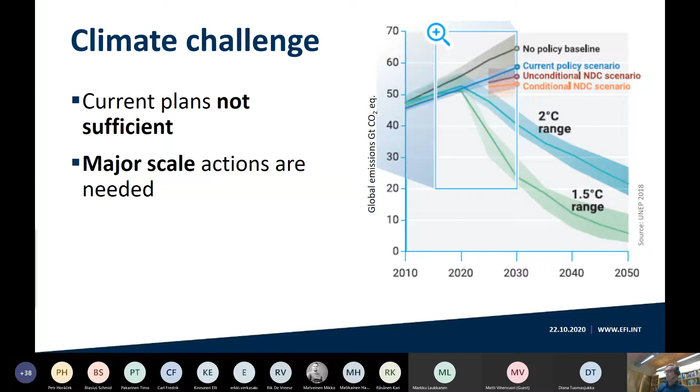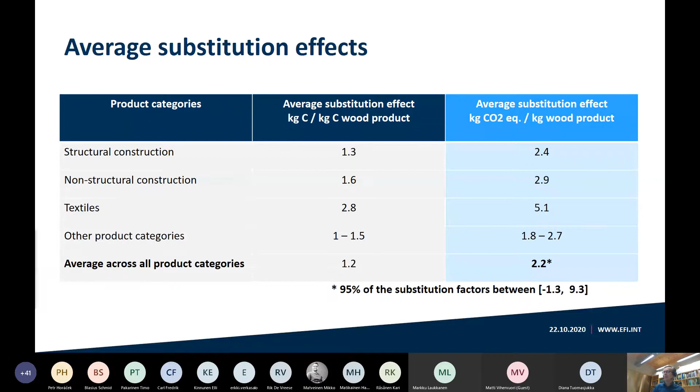If we use the kilogram of wood or forest biomass for textile production, then the numbers can be even bigger. But in any case, there is clear evidence that in the technosystem, wood construction is clearly beneficial in terms of climate change mitigation. And this is of course important for the wood construction sector and our climate challenge, as I mentioned. But on the other hand, if we have good product level substitution benefits, that is as such not enough. We also need to have big market volumes

In the packaging and paper industry, we have the market volumes, but on the other hand, we have quite a lack of knowledge because of the large variety of packaging materials. We really don't know what the average substitution impact of packaging materials could be. We need more studies here. Then if we consider the printing and writing paper side, we have the market volumes, but here the substitution could be the other way around because of electronic possibilities to read newspapers, for example.

But again, in construction related materials, sawn wood production, for example, we have the market volumes and we have relatively high product level or intermediate product level substitution factors. So we can say quite safely that wood construction already contributes quite significantly to climate change mitigation. So these were the results, and now I'd like to give some take-home messages on the wood construction side before Rik continues on urban planning issues.

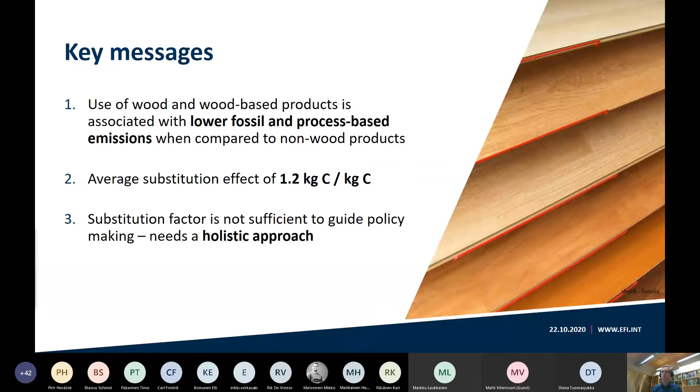So just to repeat, almost always when using wood or wood-based products instead of non-wood-based products, it is associated with lower fossil and process-based emissions. So this seems to be clear evidence. We can produce some average numbers, but on the other hand, this type of substitution calculation is important, but not sufficient to make decisions or guide policy decision making. As I mentioned earlier, we need a holistic approach that takes into account the full picture: the left-hand side of the equation on forest ecosystems and the right-hand side on technosystems. Both should be taken into account simultaneously.

And finally, even if we are using wood as a construction material, it's really important to try to do something better in the future than we can do currently. We need more resource efficient production processes. We need to minimize material waste. And this is something that the wood construction related industry should keep in mind as well. We need to do better in the future than we can contribute today.

Then in many significant potential future areas, we have quite a lack of knowledge on the climate impacts of emerging forest or wood-based products in the textile industry. We need more studies. The packaging industry, and especially the chemical industry, is a really wide topic, and we need many new studies. In this frame, although there are of course knowledge gaps when it comes to mitigation impacts of wood construction, I would say that it is still maybe the best known area. So that is of course a positive side for wood construction.

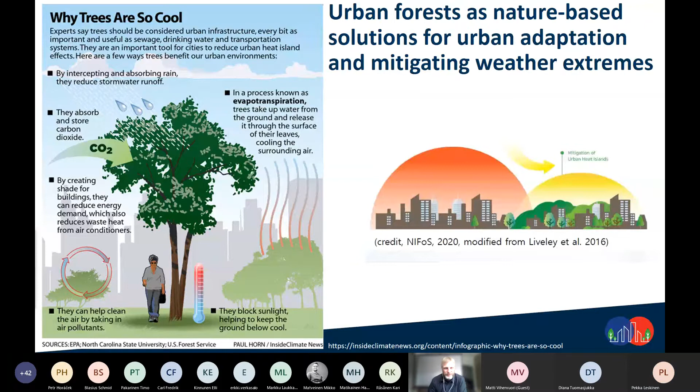So next slide, please. Pekka, I think you are on the controls. Can we have the next slide? I'm trying to change. I will continue my story in the meantime.

As you see here, and as already introduced, the co-benefits of urban trees and urban forests go beyond carbon and climate. As I said, creating a nice environment leads not only to a shift in the use of transport systems, but to healthier people. The impact of urban forests and trees on public health is really still underestimated.

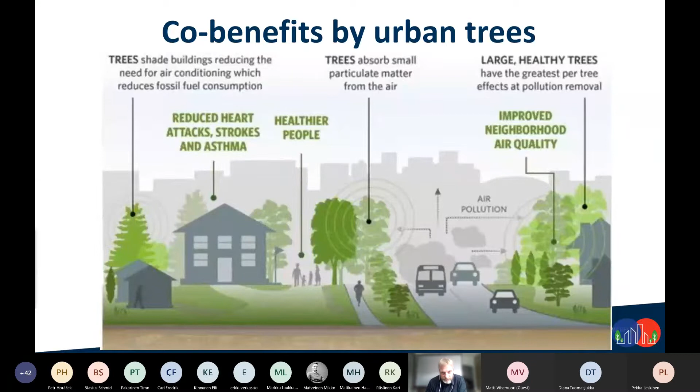And of course, this is a real flagship project, but it illustrates very nicely what we can achieve with building with trees and building with wood or building with nature in the cities. Every year, the trees and the shrubs on the towers, there are 2 towers, avoid or absorb 30 tons of CO2, and they produce 19 tons of oxygen.

As I already introduced, the energy consumption both for air conditioning and for heating the building are lower. It's a 1/3 gain we have there, and it contributes to a decrease of 2 degrees Celsius for the urban heat island effect. Well, this seems to be not very high, but it is important. Every degree we can avoid in the heat island leads to saving human lives.

Also for the biodiversity, well, it's a calculation, it's an assessment. I don't think there are already counts done, but the expectation was there would be 20 more bird species present around the building and 59 more plant species than if this would have been a traditional concrete tower. And I've also introduced the healthcare impact.

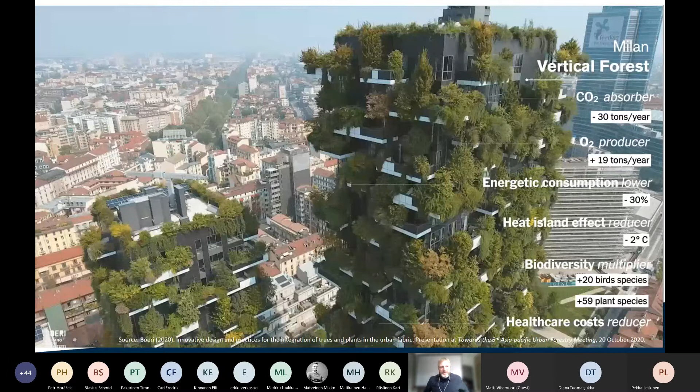This brings me in the next slide to the concept of integrative planning in cities and landscape planning. The Bosco Verticale illustrates that integration of landscape planning and city planning can contribute to compiling shared goals in respect of sustainable development. It's not only the building guidance who has to put forward the need of building with wood, but also landscape architects, city planners, and so on should share the same goal.

And well, looking at trees and woods, it's a nice story, maybe, that you can start from a single tree, which is at the moment growing next to the building, but it can also lead to a new wooden building in the future. As I said, it's a transdisciplinary approach, which brings different sectors and different professions together to solve common problems, which are dealing with public landscape.

Although, of course, lots of the forests are private, forests are still seen as public owned. There are lots of opinions on forests. I don't have to tell this to this audience, I think, but also buildings like the Bosco Verticale create some common language, common experience for the cities.

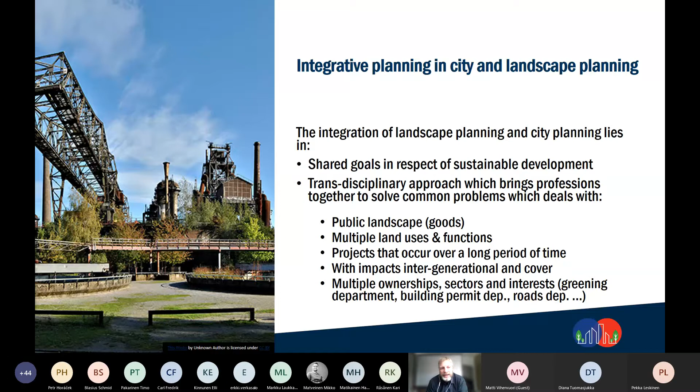So in integrative planning, you start looking from a very broad, very wide perspective, the surrounding landscape, and this ultimately leads to creative visions and integrative visions for the individual building, like the Bosco Verticale.

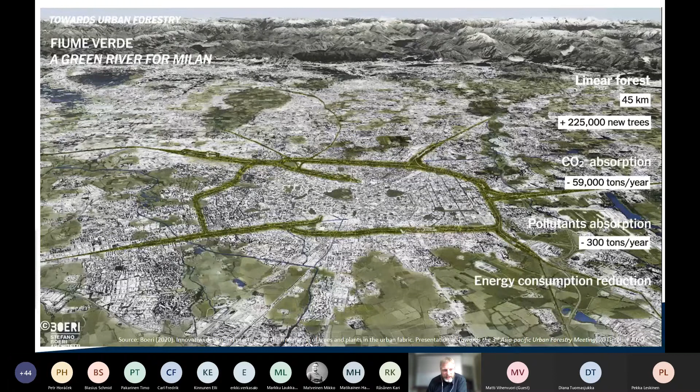So integrative planning starts from creating multiple benefits for, well, in the case of the Bosco Verticale, for new residents, but also for the communities who are already there. And we all know that there's a lot of movements in our cities. People come in, people go out, new communities come on, old communities sometimes feel pressure from new communities.

But if you work from an integrative planning perspective, you do not only create a new building, but you can also create a new environment which is also attractive to other people. And by building things like the Bosco Verticale, which is integrating a lot of green in the urban landscape, we also provide some additional benefits for people who are already living in the area.

So we can promote the use of wood and wood-based materials as substitutes, like Pekka introduced, but at the same time, we also can integrate some new tree planting. And also there, for planners and politicians, for instance, this can be a very nice story where you can indicate, well, look, for this new residential area or industrial area, we had to cut, let's say, 500 trees, but look, we will be planting 5,000 trees. So we are really substituting what we took out of the forest by new trees and new urban forests.

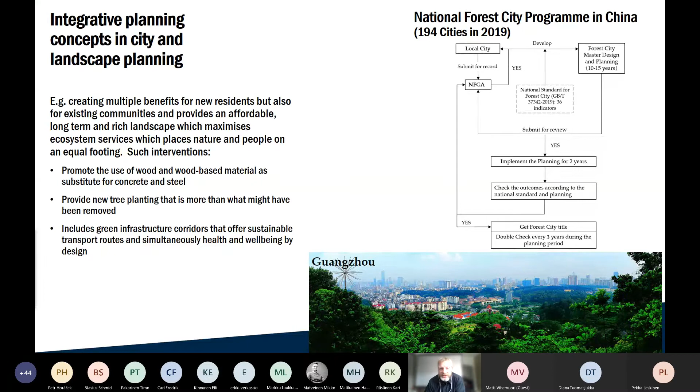Of course, when it comes to planning, China is a very nice example of how you can achieve things with longer term planning, 10, 15, 20 years. And within the Clearinghouse project, we are looking at what we can learn in Europe from this Chinese National Forest City program.

So this brings me to my key messages. The first message is reiterating what Pekka said. Wood substitution is not sufficient. We need a holistic approach, and the holistic approach should go beyond the individual building, beyond the individual tree, and also beyond the decision to build with wood. We should look at how we can include urban trees in the urban environment.

One of the challenges, which I didn't touch upon, is to conserve existing trees and forests in cities and towns when we are redeveloping or developing cities further, but also how we can use building and urban planning to increase the tree cover, at the city, street, and plot level. And building on what Pekka said, we should also integrate the use of wood-based building materials in building directives.

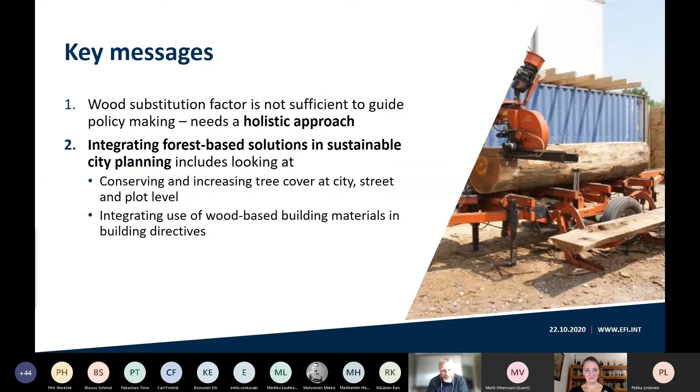With that, I would like to lead over to Matti Kuittinen. Matti is an architect with a passion for resource efficient and sustainable construction, and he has been working on improving building performance in different roles, such as a professor at Aalto University, but also as a senior advisor at the Ministry of Environment of Finland. In the latter function, he has been fundamental in advancing a method for assessing low-carbon construction for Finland. And I'm curious about his presentation today, which is about carbon footprints and handprints, searching for the balance in the built environment. Matti, the floor is yours, and please feel free to share your slides.

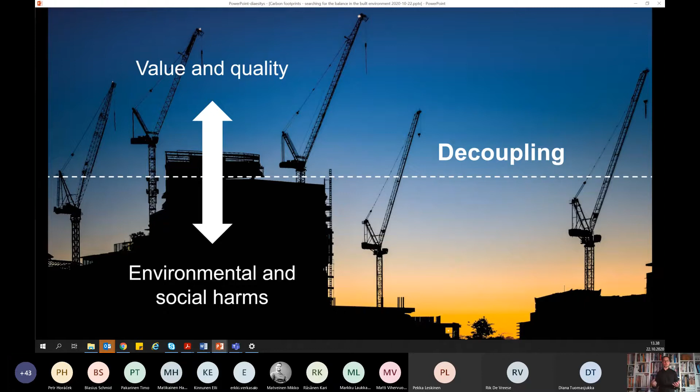This is a significant challenge for all of us, and I'd like to say from the beginning that we should not build anymore and think that we will solve the crisis by doing the same amounts of operations in a different way, but we should also critically review the needs for all new operations, including construction operations. The reason for this is rather simple. We at the moment consume half of global raw materials for construction, and in the near future, as the population grows towards 11 billion, as the infrastructure ages, and as the sea levels are steadily rising due to the most likely collapse of the Greenland glaciers, there will be significant needs for new spaces for different functions and relocating the existing spaces and infrastructure.

And if we take a look at the climate budget side of this equation, according to IPCC, at the moment we have around 570 gigatons of CO2 available within the carbon budget if we want to keep the global warming within 1.5 degrees. Now, if we continue to produce construction materials, such as cement, steel, aluminum and plastic, with the current consumption rate and current technologies, we're going to almost double the amount of emissions that we could allow to emit if we want to keep the global warming in the preferred range. So that's rather serious, and this is just between now and the year 2050, so in 30 years.

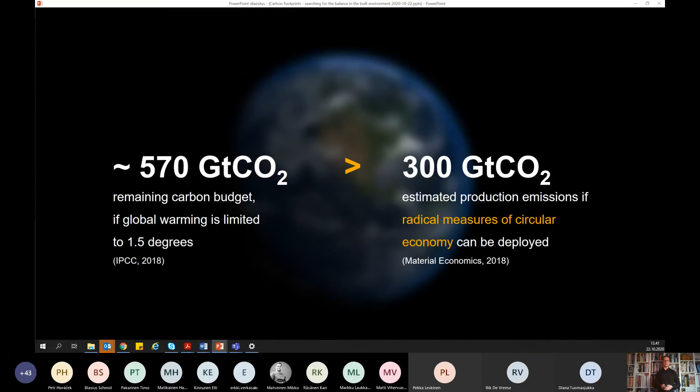If we could, however, switch into production technologies that are very energy efficient, and if our factories could run on renewable energy, then possibly we could push this figure down to a nicer looking number of 550 gigatons. But that's still almost the entire global carbon budget, so it's still too much. There's actually a meta study of recent processes and recent innovations, and it's been estimated that with these new radical measures of circular economy, we could possibly push this figure down to 300 gigatons. But that requires rapid scaling of the lab scale technologies that are still in the lab. So that's also challenging, but this appears to be the only way to go if we truly want to keep with the Paris Agreement's goals. So that's why the decoupling is important.

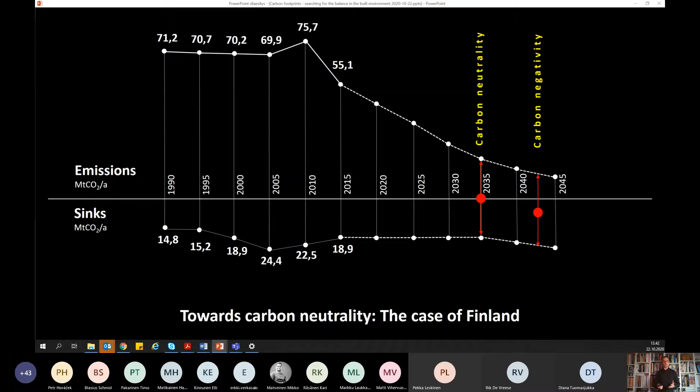Now, if we look at the Finnish case, we have relatively good statistics about our emissions and sinks over the years, and then we have political goals of reaching carbon neutrality and carbon negativity. So we need to go down with the emissions and maintain the sinks, and hopefully by year 35, so in 15 years, these are in balance and we have reached carbon neutrality. And as you know, the quest doesn't stop there, but we are aiming towards carbon negativity in the 2040s. And I consider it important to consider how we can also increase those sinks within the built environment, as the previous speaker was talking about. That might become an important issue, especially when it may be rather difficult for our agricultural sector to cut their emissions in the required scale.

Now, this is why I said in the beginning that we need to reconsider the needs for new construction. Do we really need to build so many new buildings? If we look at the population trends in Finland, it looks rather flat. Of course, we understand that the infrastructure is aging, but I think that this requires some consideration of thoughts that may first feel a bit unpleasant.

Because I'm an architect, I've been thinking about how these should be translated into design guidance and priorities. And I feel that we should reconsider the priorities for construction like this. I think that the most preferred option always should be to utilize already existing spaces that don't need modification, but just need agreement on the share of those spaces. That way we could have a much better use of the existing invested resources in the built environment.

Then the second best option would be to renovate an existing building so that it fits the required needs. Third best option would be to do an overall refurbishment of the building. And actually, when we look from the resource efficiency and carbon efficiency viewpoint, building a new one could be considered as the last option. Of course, this is rather narrow-mindedly looking only from the viewpoint of resource efficiency and climate impacts. There are other reasons that may well justify building new buildings, such as health or safety and so forth. But if we just consider the use of resources, this is how it could look. This could be the priority for construction.

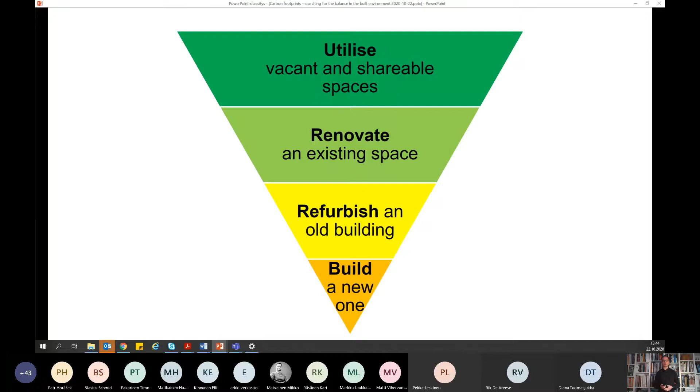Then if we choose to build a new building, what are the means of doing the new building in the most climate and carbon efficient manner? I could present a strategy that looks like this. We could consider three different aspects. We should consider the premise for building, then sufficiency and efficiency. Normally we only talk about efficiency, but I think that we have perhaps unintentionally left aside the questions of premise and sufficiency. What do I mean by these three viewpoints?

The premise means asking these rather difficult questions already in the beginning of the project. Do we really need to build? Couldn't we use space as a service? Or if we end up building something, what is the most efficient or most optimal building type for our needs? And how could we share those resources that we are developing and creating while we are building? Then, if we just consider the premise without changing sufficiency or efficiency, we are already better off.

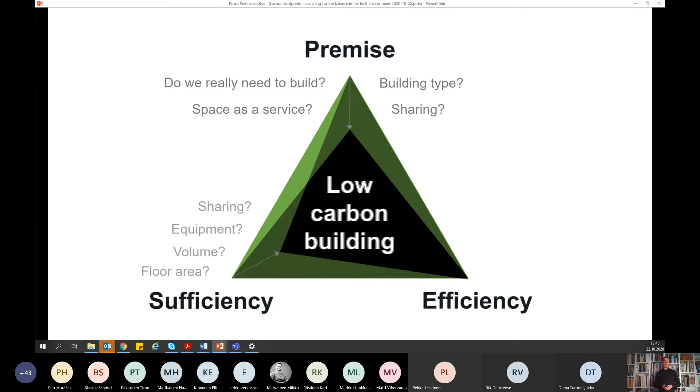The next point where we can make a change is to consider sufficiency. How much floor area, how much volume do we need for the building? Can we do the design in a manner that really serves the functions and the needs of the users and still use less area and volume? And again, how can we share the space? And if we do these interventions of sufficiency, even if we wouldn't change the premise or the efficiency, we would again be better off towards a low carbon building.

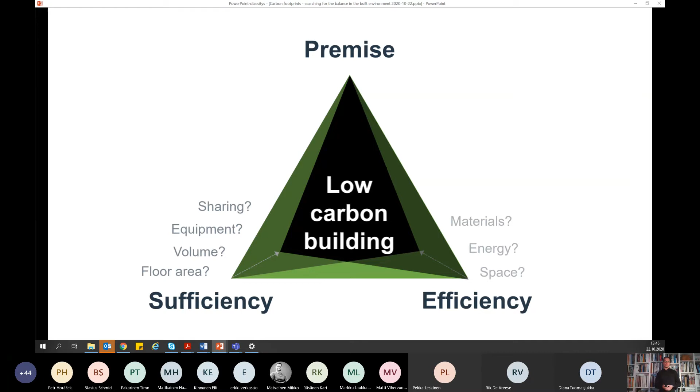Then finally, the efficiency is what we normally talk about when we talk about energy efficient or low carbon buildings. We consider the efficient use of space, energy efficiency and material efficiency. And these are of course important, but I argue that we shouldn't start from the efficiency without first thinking about the premise and the sufficiency. And in the ideal case, if we can make improvements in all of these areas, the added impact would be even better.

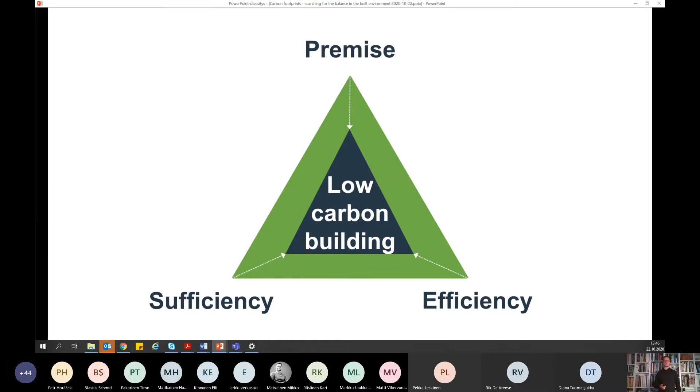So then a few words about policies. As many of you know, we are planning new building regulations, and one of the things would be limit values for different building types in terms of their carbon dioxide equivalents. The title of my presentation was about handprints and footprints, and here is where that concept comes in. Now, the emissions on the right-hand side, we normally describe them as footprints, something negative that happens. But I think that we should start to consider also the handprint side, which is normally understood as some positive impact that wouldn't happen without the project that we are undertaking.

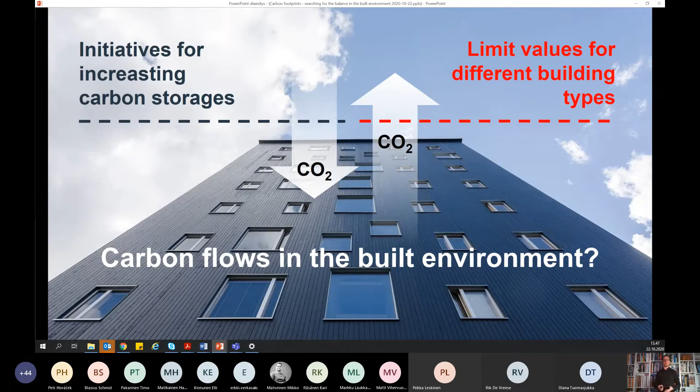And that's why in the regulation we are planning also for setting initiatives and incentives for increasing carbon storages in the building stock. So both sides should ideally be in balance, but it's of course extremely difficult to reach a total balance without compensations. This is how the forthcoming policies would look in Finland over the life cycle of a building. If we look at the typical life cycle of the building, that starts from the design, then we have the production phase, then the construction phase, use phase, and end of life phase.

Well, here in the design phase, we are planning to set mandatory material declarations for buildings, also mandatory climate declarations, through which we could observe that the building stays within certain given carbon footprint limits. And this would happen before year 25.

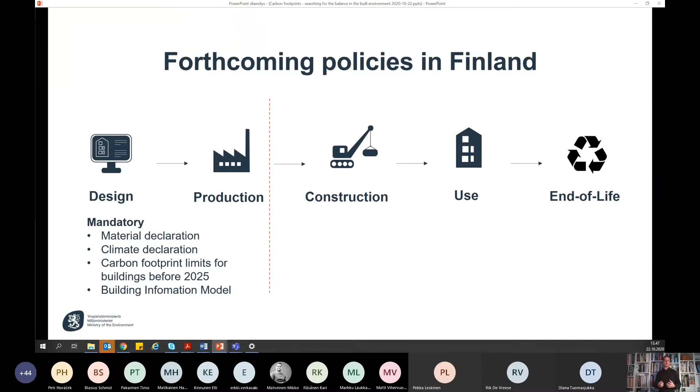And then in the design phase, we would also require a mandatory building information model through which all of this information actually could be retrieved. And that's the ideal goal. Then at the construction stage, before the building is taken into use, this information would have to be updated into so-called as-built status so that we can really see what materials ended up in the building.

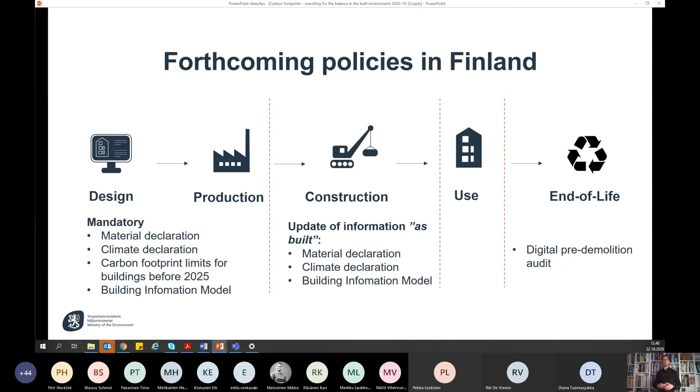And finally, when we do refurbishment or even demolish the building, we are looking towards digitalization of so-called pre-demolition audits that let us gather better understanding about all the material flows that are associated with the built environment. And indeed, the built environment is a huge repository of different materials. Some of them are useful, some of them are harmful.

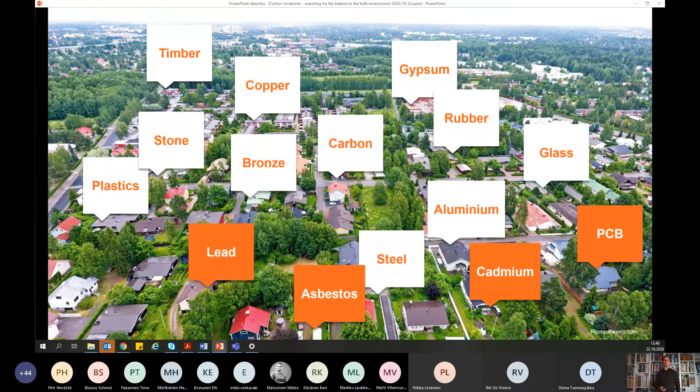And we have started to approach this material flow or metabolism through the lens of carbon, because it is a critical asset within the next decades if we truly want to save the planet from a climate crisis. And as we well know, we have a tremendous potential in the forest if we really keep the forests as a carbon sink and utilize the materials in the most optimal manner.

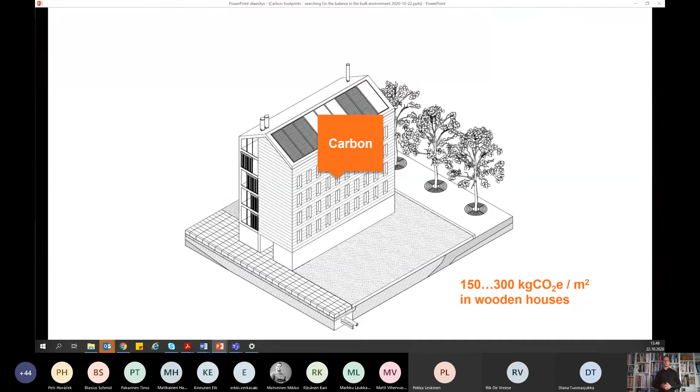And the interesting question is how could we improve the potential of buildings for storing carbon and for having a better substitution potential between different solutions. And for figuring this out, actually, I had a study with my colleagues in Germany, and we were looking at all possible ways of storing carbon into buildings. We could identify 13 different approaches. Of course, the most common ones are bio-based materials and composites. This is self-evident for all of us.

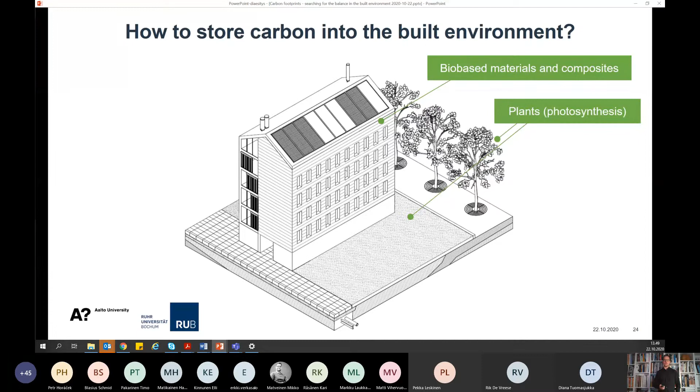But then the role of plants and photosynthesis, this seems to be something that we could enhance. And one way of looking at this is to also take into account the soil organic carbon. And how can we really, in a better and more conscious and controlled manner, accumulate carbon into soils? And interestingly, also in the urban environment, this seems to be a really good potential. And in some cases, urban soils can even accumulate more carbon than natural soils, which, at least to me, was counterintuitive, but there is strong scientific evidence for that.

One way of boosting that is to use enhanced weathering, in which we put some minerals like olivine stone powder, or similar minerals that weather, into the soil and thus boost the carbonation in soil. But also biochar in the growing mediums, but also within certain products such as asphalt or concrete, can increase the carbon storages in the built environment.

Then, of course, we have the carbonation of cement-based products that could be utilized to a greater potential, especially if we can utilize concrete rubble in some landscape works in which it can be in contact with air, in which case it carbonates faster. Then we have some sci-fi or high-end solutions like direct air capture of CO2, which seems to be rather potential in the future if this can be plugged into the ventilation machines of buildings.

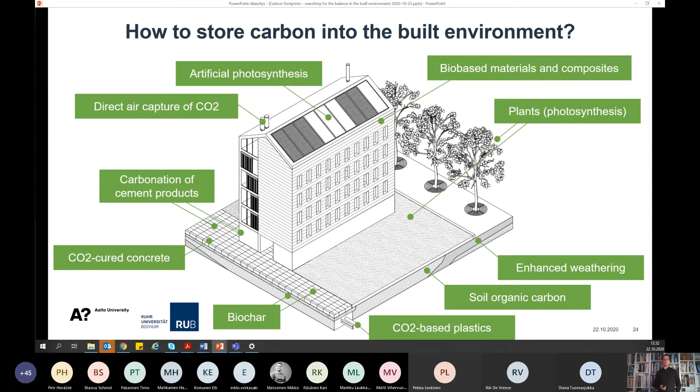So with this illustration, I just mean to show that we have promising technologies already now. We have some technologies that may be available tomorrow, and then we have some technologies that are on the horizon, but in a very, very long time frame may be applicable. So we should make use of the existing methods and in a consistent manner apply these to building design. So this is where we started, the 50% consumption of materials. And the question for us is how much of the materials that we use for construction could be used in a manner that we also turn the built environment into a carbon bank?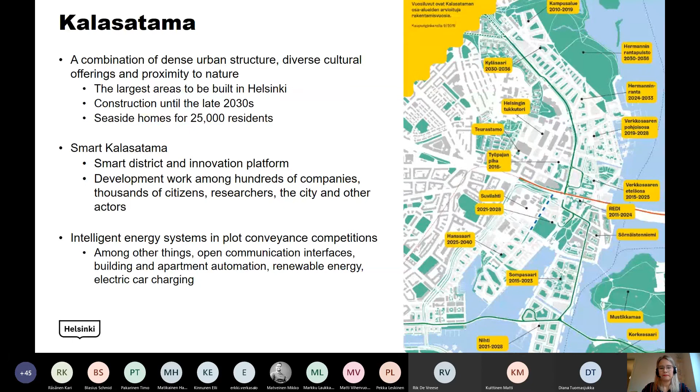And Kalasatama is also a smart city district of Helsinki. So it is being developed flexibly and through experimentation and together with residents, companies, the city, and other actors as well. And that's basically why we chose this area.

So we have this upcoming plot reservation competition coming exactly in Kalasatama, and we are aiming to test very ambitious environmental criteria in one of the upcoming plot reservation competitions this autumn still. And this competition aims to improve the stormwater management, resident comfort, energy efficiency, also increase the use of renewable energy, of course, and reduce the carbon footprint.

And also I can share at this point that the city's plot reservation conditions were tightened in 2019. So we have at the moment the strictest ones in Finland, and we are aiming at the A energy efficiency level in all our quality and price competitions at the moment.

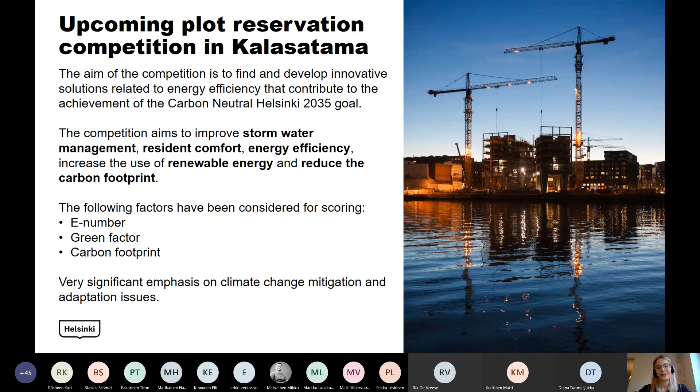But what is interesting in this case is that we have considered E number, green factor, and carbon footprint to have a significant, even determinative emphasis in this competition. And we really hope that by doing this, we will achieve very ambitious plans for this plot. And we will see in the nearest future how it goes.

Okay, so then if we move on to the design phase, what happens in the design phase? Well, I will explain at this point that the city of Helsinki runs roughly two kinds of building or design projects: the so-called traditional projects, where we first choose the designer and then we choose separately the contractor, and the city as client is leading the design phase. And then we have these design and build projects where you choose one contractor who both designs and builds the project. Let's take first a look at this first scenario and see what happens there.

So, to make sure that we design and build ambitious municipal buildings, we have developed in Helsinki this life cycle management model to set and monitor project-specific environmental targets throughout the project. And this is very interesting because it brings together all the most important life cycle requirements of the city's various guidelines and goals and those strategies that I just shared with you. So these are the starting point for the design.

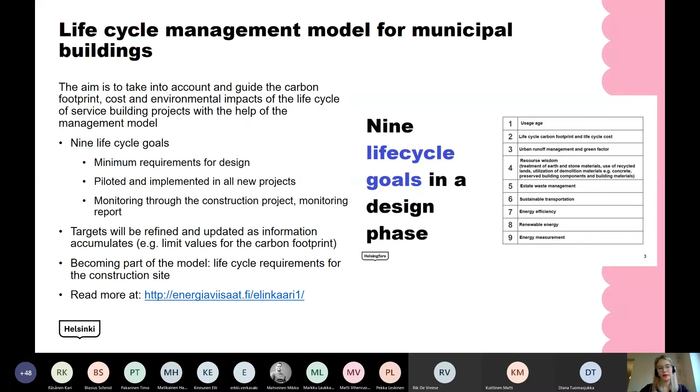But here we wanted to procure 4 wooden apartment buildings, which are located in Kuninkaantammi. Kuninkaantammi is one of the newest residential areas in Helsinki, and it is also an area where solutions related to climate change adaptation and mitigation have been developed and piloted for years already. So that's why we felt that this could be a suitable area for testing this.

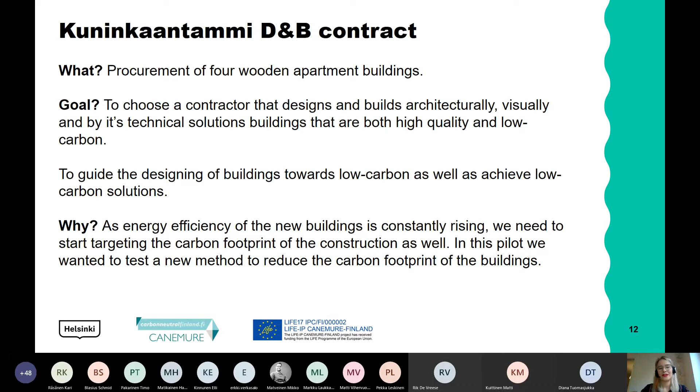So in here, we wanted to guide the designing of buildings towards low carbon, as well as to achieve low carbon solutions. And why we did this, of course, is because as the energy efficiency of new buildings is constantly rising, we know that we need to start targeting the carbon footprint of the construction and the construction materials as well. And in this pilot, we wanted to test a new method to reduce the carbon footprint of the buildings in design phase.

Then how did we do it? So the new approach here was that tenderers needed to calculate the carbon footprint of their plan or the design. And then the result was scored as part of the tender. So it was quite new and interesting. And the carbon footprint was calculated using the low carbon assessment method for buildings by the Ministry of the Environment, and this guaranteed comparable offers as well.

Of course, we wanted to give the climate criteria proper weight in this procurement, but at the end we needed to compromise as always. So the quality had 50% weight and the price had 50%, and of the quality, the environmental criteria had 20% of the weight. Of course, in addition to award criteria, we also had minimum requirements to make sure that we have an ambitious enough solution. So, for example, the E number needed to be lower than 75.

And well, what was the outcome then? So we received 2 offers, which I think is quite normal, because, sorry, I forgot to mention that we had the obligation for wood construction here. So the market for the wooden building contractors is still quite limited in Finland. But what was good news is that both of the tenderers were able to calculate the carbon footprint for their tender, and there was a quite significant difference between the carbon footprints, also because of the heating method they selected.

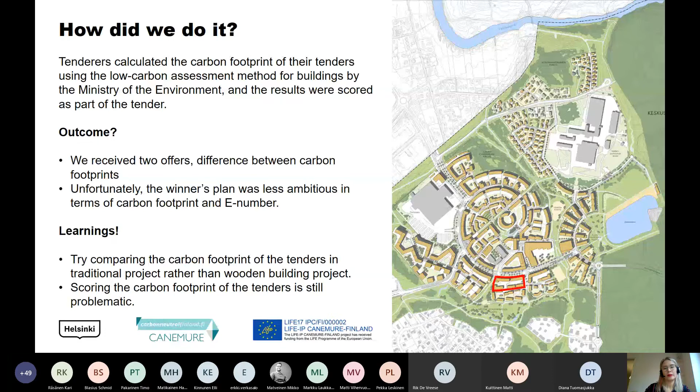So after all, I can say that the framework used here still requires practice and fine-tuning in terms of scoring the carbon footprint, for example, but it could be used in some of our projects in the future as well. Okay, and lastly, I still have a few minutes. Let's take a look at our construction sites and what we're doing there.

So the Ministry of the Environment, Senate Properties, and a few cities, the cities of Espoo, Helsinki, Vantaa, and also Turku, signed a voluntary Green Deal agreement to reduce emissions at our construction sites in September this year. So this is also very fresh. The Finnish Public Procurement Green Deal is a voluntary agreement between the government and the procuring authority. And the aim of this Green Deal is to create a gradual path forward for zero emission construction sites by 2030.

And in the background, why did we do this? Of course, it is the fact that emissions from work machines also account for a significant share of urban and municipality climate emissions. And there are also emissions that are hazardous for health that we want to reduce. So that is why we took part in the Green Deal.

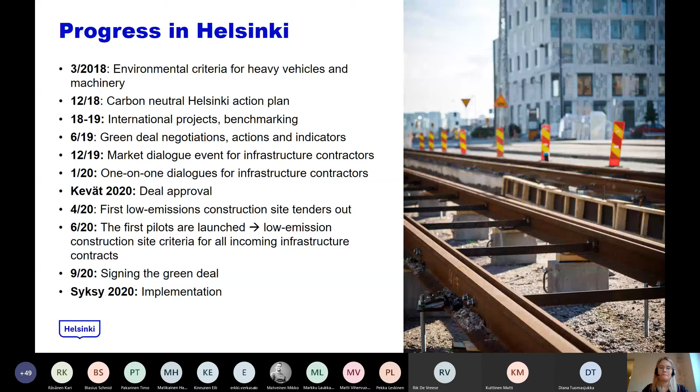And then the next challenge for us is to expand the pilots to our house building and maintenance projects as well. But this is something that is by default from now onwards on our infrastructure contracts, and I think, although the emissions from construction sites are not that big, this is still very important, and it has received very good feedback from the construction industry.

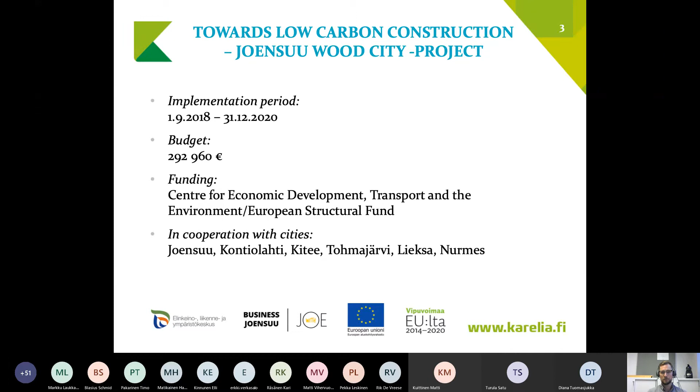So some basic information about our project, which will end by the end of this year. At this point, I want to also thank our financier, Pohjois-Karjalan ELY-keskus, for making this project and this journey possible for us. About our project objectives, the project has been focused on strengthening the know-how and understanding related to low carbon buildings and low carbon construction in general. And we have been working very closely with the different municipalities in North Karelia in order to increase their knowledge as well.

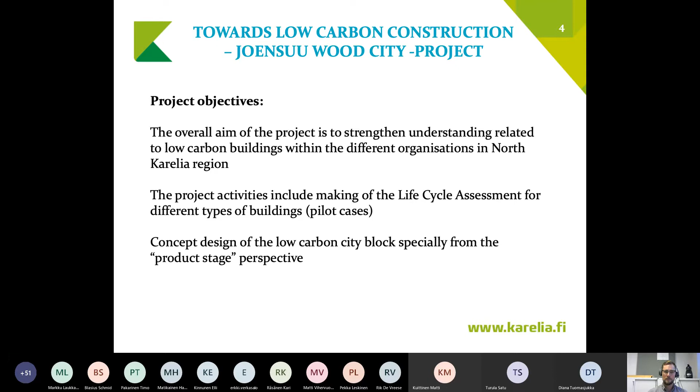During the project, we have carried out life cycle assessments for different kinds of building projects, and those projects and assessments have worked as pilot cases for our activities. We have also been doing some concept design for the low carbon city block, focusing especially on the product stage phase, and Mika will tell some examples about this later on.

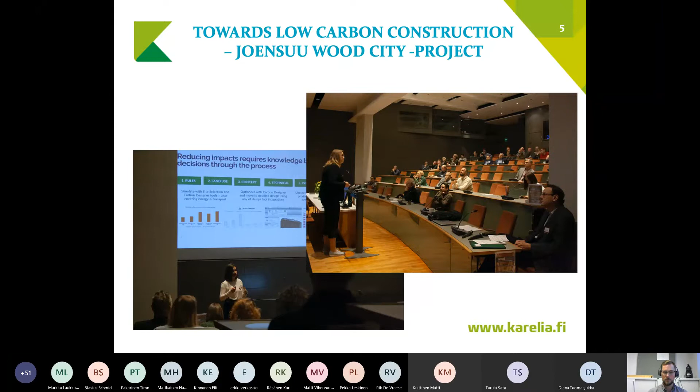I want to shortly show some activities we have been doing in the project. A big part has focused on knowledge transfer related to low carbon buildings, and related to that we have been arranging different kinds of seminars and workshops to increase knowledge within the stakeholders. We have been arranging study trips and benchmarking what others are doing in Europe related to this topic. And this example is from Austria.

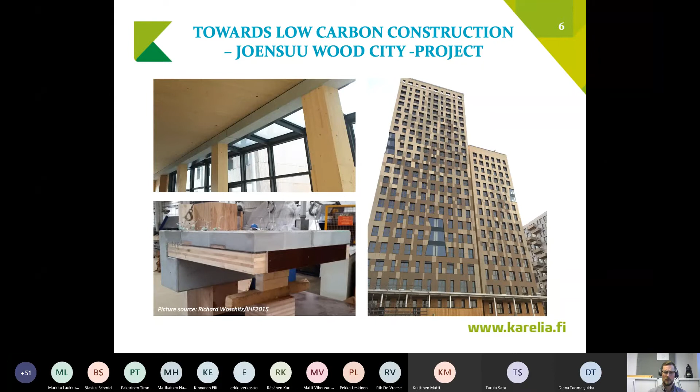Last autumn we arranged a study trip for our stakeholders to Austria, and we also visited this 24-story high wood concrete hybrid building in Vienna. This example also strengthened the assumption that if you want to build low carbon buildings, you very often have to be ready to combine different materials to achieve the best possible results.

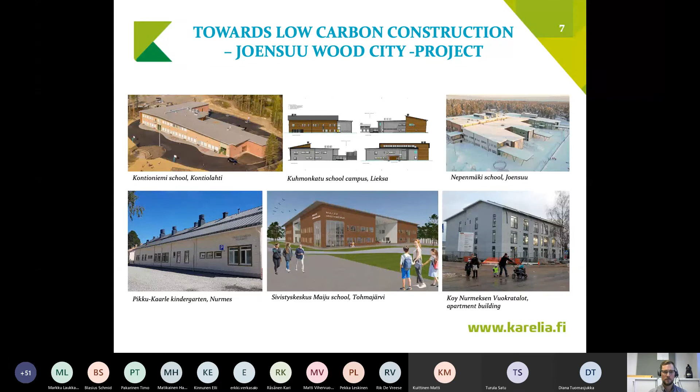Here are some buildings listed. For these buildings, we made the life cycle assessments, and these assessments have worked as pilot cases. Three of these buildings have been made out of timber, in this case massive wood, and half of them have been made out of concrete. And here you can see some results based on these assessments. It has also been nice during this study to compare different assessment methods for the emissions. In this case, we used the Finnish Ministry of the Environment method as well as the EU level assessment method.

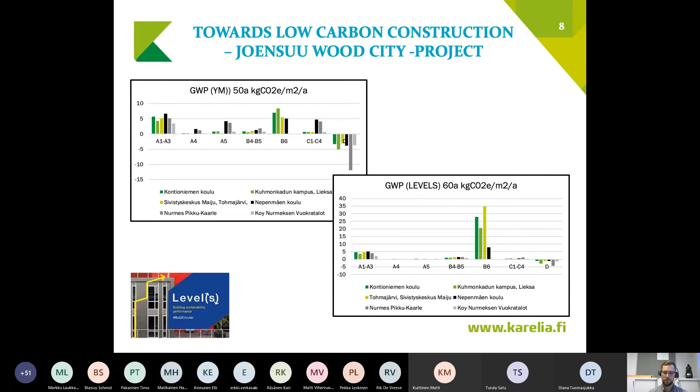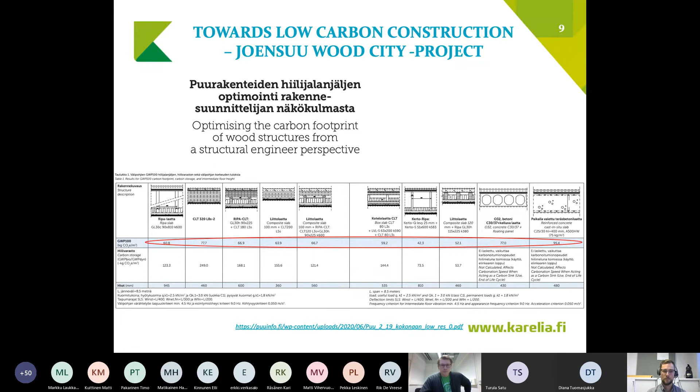Okay, thank you, Mikko. I will start sharing my screen. Just a moment.

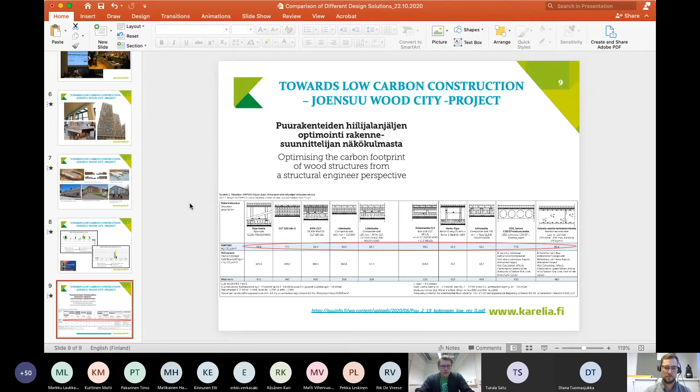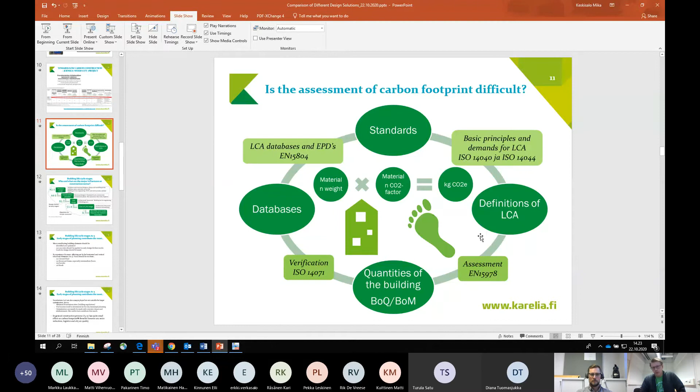There. So my own background is as a structural engineer. When I'm looking at the most likely person to do these carbon footprint assessments, they're mostly architects. So it has been also a goal of our current project to show the structural engineers how you can do the assessments and if it's difficult.

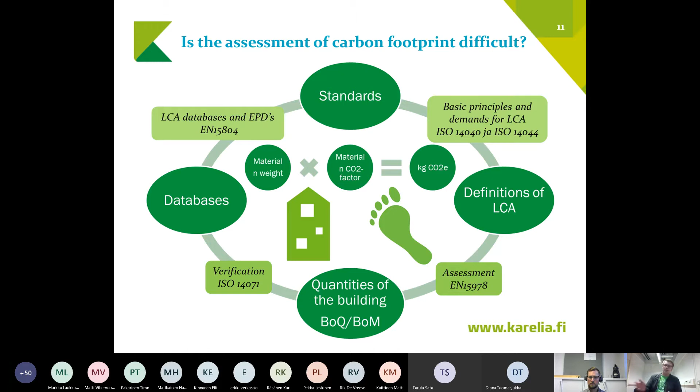And some of you might know, we engineers just love these standards and design guides. So it's easy to give them these ready-made methods and guidelines they can follow. So basically you just have to follow them so you can compare the designs equally among each other.

But when we look at the building life cycle as a whole, where are the most potential parts? We know that the energy consumption is a big deal in the overall carbon footprint of the building. But now we should focus also on the product stage, where we have the potential to minimize the carbon footprint by optimizing the structures itself.

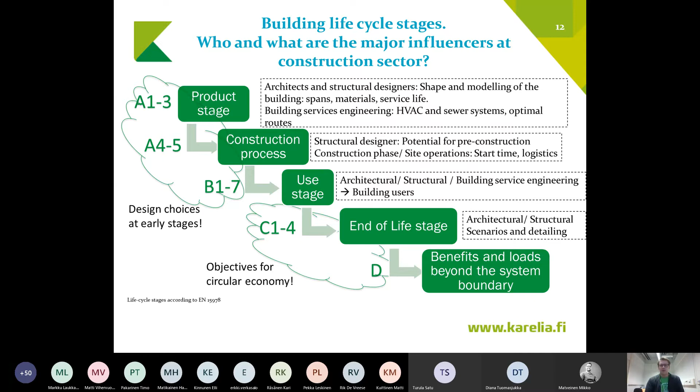And that's where we architects, structural designers come in with the building service engineering. So we get the most efficient building footprint, what is the optimal shape, how it should be orientated. And lastly, we also can make good methods for the circular economy when we are concerning the use stage and the end-of-life stages. What happens to building materials after demolition or when we are renovating the structures later on.

But you shouldn't go all crazy and just go optimizing every paint and varnish and flooring. You should just get the most contributing elements. You should identify them and then start optimizing them. And like I showed earlier, with the cut-off rules stated by the standards, we don't have to take into consideration every small connection part or nails or screws for the wood building. We can take the bigger picture with the floors that are made for structural bearing capacities and so on.

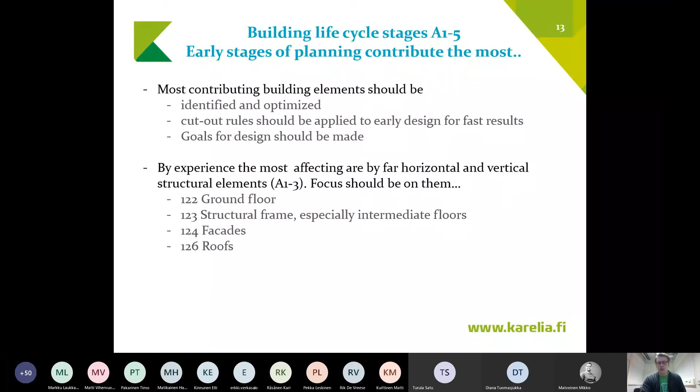So by far, I would optimize the ground floors, structural frames, especially the intermediate floors, meaning the horizontal structures, facades and roofs. So concentrating on the big areas is the key to making it easier. Of course, there are the foundations as well, but in Finland as well as in other parts of the world, we have the minimum foundation sizes when we are using piles for pile foundations and so on. So there's not so much potential for those to be optimized. So we have to consider the structures which are above the ground level. Those are the ones I would start optimizing and doing the work on.

Also, the transportation of the materials to the site contributes to the carbon footprint as well. However, its share isn't so big, but we can use that to reduce the noise, improve the logistics and city air quality in general when we are taking those into concern.

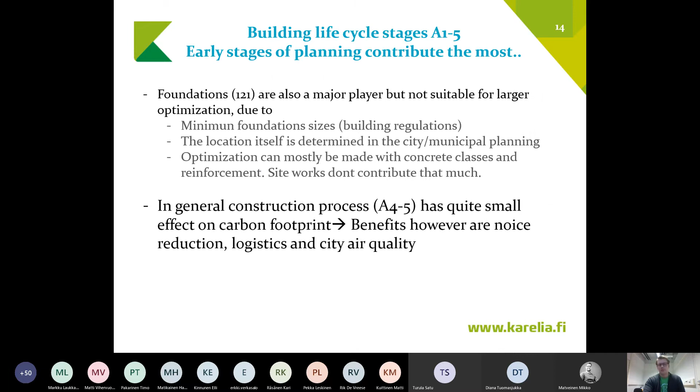So we are taking a quick look at one of these block houses. In our project, we had this by the riverside. There are these 3 block houses to be built, but now they might be made out of concrete. We concentrated on the middle one, and we shouldn't start optimizing the whole building at once because it's time consuming, and you are not taking a look at the things that matter. So optimizing one floor and then spreading the effect to all of them is more efficient this way.

So the original design option was done by Sweco, structure designers, and the goal was to minimize the cross sections by providing these additional load-bearing shear walls that take up the loads, which can be seen at the lower end of the slide, in the middle, whereas these load-bearing directions and those darker lines are presenting the walls themselves.

But when we do this kind of design, there's not so much adaptation possibility, so we cannot knock down the walls or make the rooms bigger. So we have to take into concern what will happen at the end of the use stage, or when we want to make it work a different way. In this case, it's a domestic residential building, but maybe in a later stage it will become an office when it's in a key position in the city.

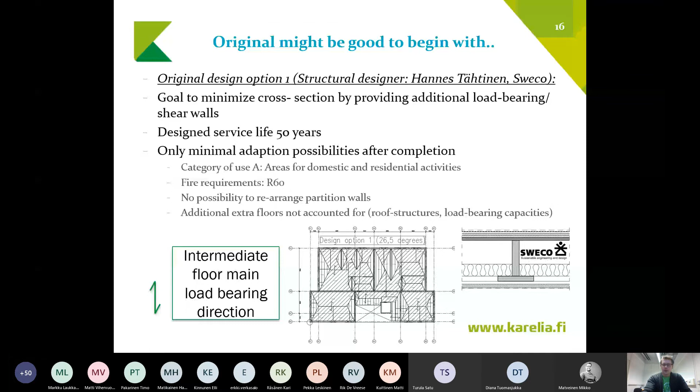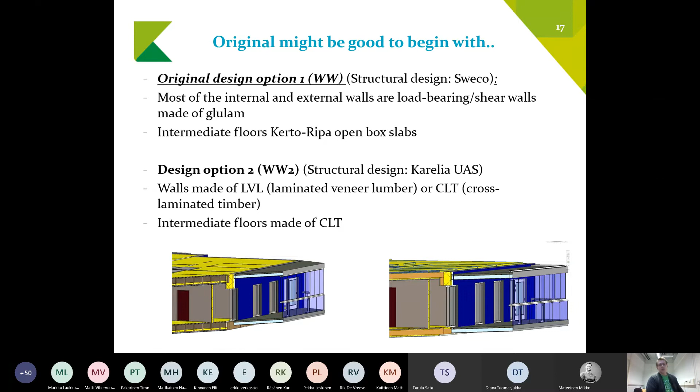So that's why the structure designer and the architect should do optional designs. For this case, we have the original design option where the internal and external walls are load bearing, and we have this Kerto Ripa open box slab, which at the right corner, where the Sweco sign is, we can see that kind of structure. But then we have to start considering other options, like do we want to use CLT or LVL walls, or do we make the intermediate floors also out of CLT?

And there's also the concrete option, of course, because it's very familiar to structure design companies, they might want to do it that way. And also we can do this mix and match option where we combine the concrete structures with the CLT or wood structures. So we can play with the idea which one is better.

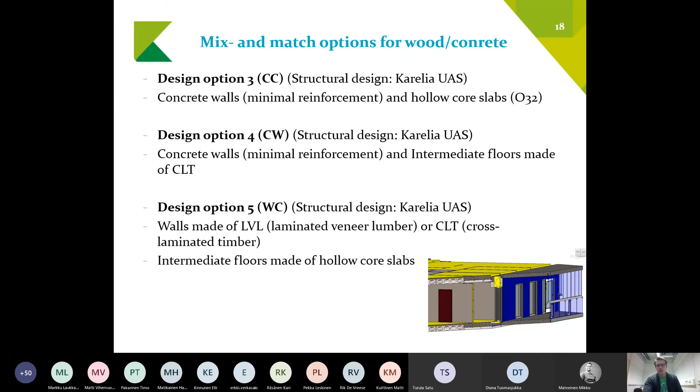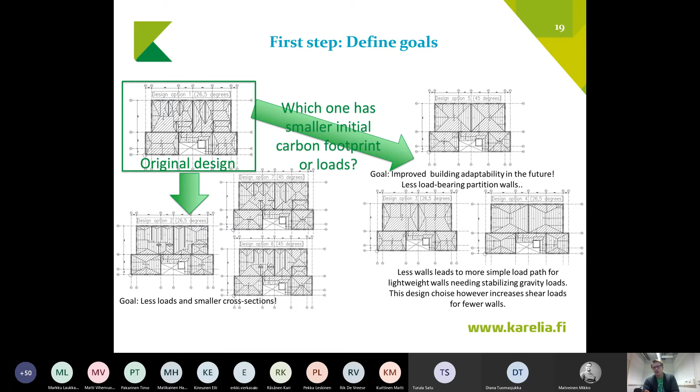So then we have this first step. We have to define the goals. At the first stage, we had the original design, which was for less loads and smaller cross sections. But we decided we want more adaptability in the future, which means less load-bearing partition walls. But at the same time, when we are taking out those load-bearing walls, it means more stabilizing gravity loads for the walls, but still the shear forces will increase. So we have to check also that aspect.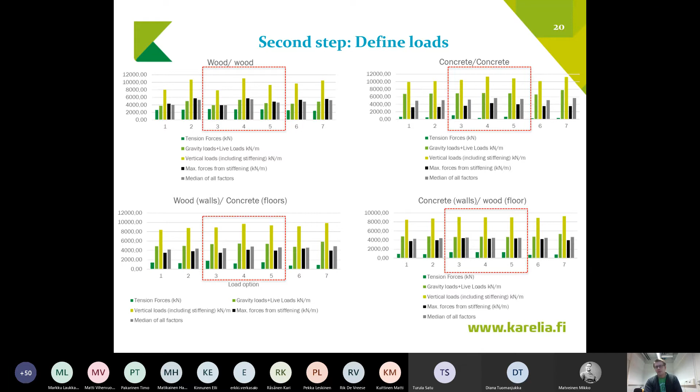So here comes the engineering part. When we have those load options, like in the last slide, we have to check which one produces the most loads. For the wood case, there are options 3, 4, and 5. And if we compare them to other options, we can see that with the concrete solution, the load-bearing walls might have to bear more vertical gravity loads. But at the same time, if we change to the design option of concrete walls and wood floor, we still might get similar loads in the structure. So it might become an even match in that way.

And when we look at the big picture, what are the load combinations for these different solutions? Then we can see that there's not that big of a difference between these, but with the concrete, naturally we get more vertical loads, however we get smaller tension forces. So it means less anchoring connections, or less difficulty in detailing.

So we can choose the best one, which in this case means we want to do design option 5 for the wood, CLT, LVL option, or the combined mix and match of concrete walls and wood intermediate floors. So we end up with these options, but it's not a single solution. There might be a mix of load options 3 and 4, which might be much better on an overall scale than the previous ones. So it's up to the designer how he wants it.

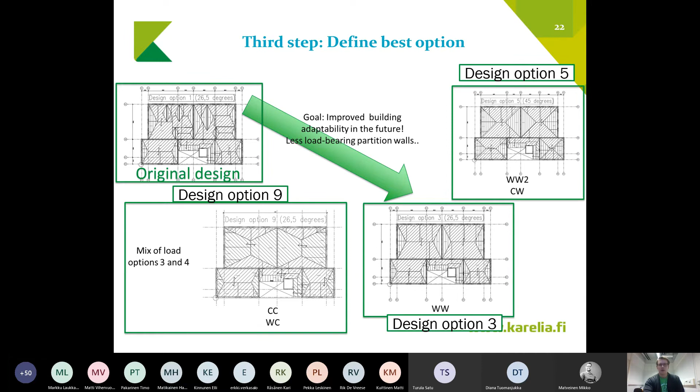But when we look at the carbon footprint of these design solutions, we know that wood is a low carbon construction material, but when we look at the bigger picture, we can see that if we combine concrete walls with wood floors, we might get almost a similar carbon footprint. And defining the goal of adaptability for the future doesn't increase the demand in a large way.

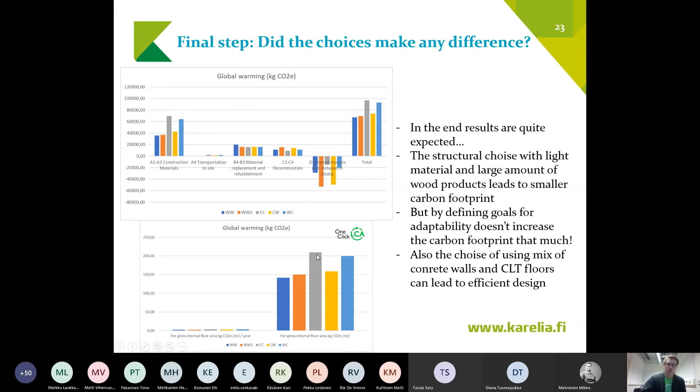And when we start chopping down what caused this effect, we can see that with the wood construction, the carbon footprint of the structural frame itself is quite small, but we have to do some maintenance, meaning that we have the gypsum boards on the floors, the ceilings or the walls. They require some maintenance, and the same goes with the facades and so on. So you should take a look at the bigger picture before just doing a comparison between these.

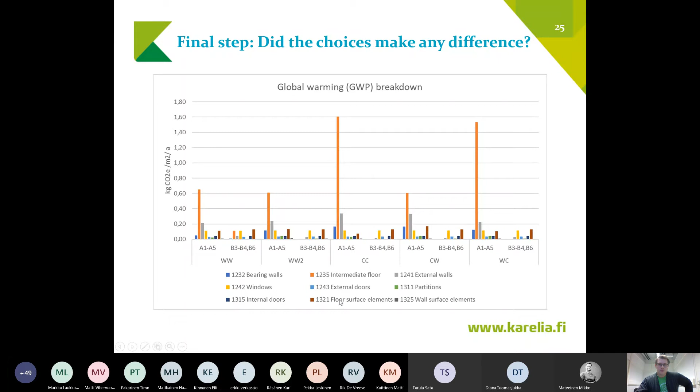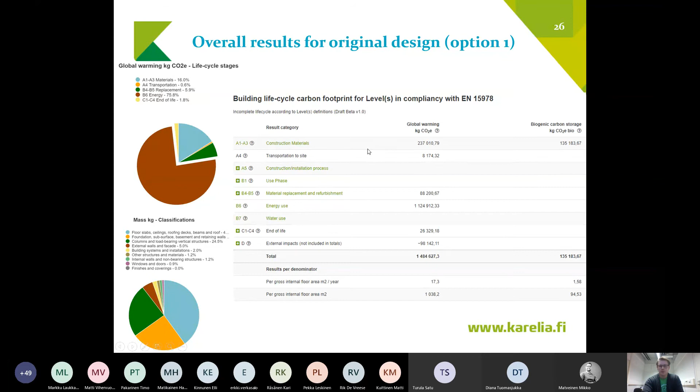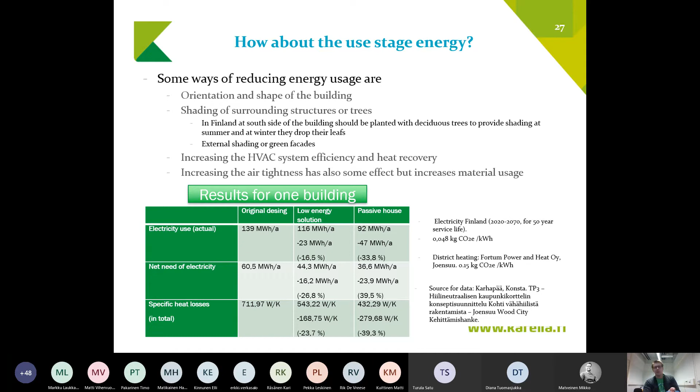And here's the use stage energy, where we can affect it by orientation, shape of the building, and like Rik said in the previous presentation, also the shade trees, how we put them in the area, how they shade the building, what are the green facades, how they can be used also. So doing the overall results and focusing on the most important parts, we can also do savings on money and increase the efficiency that way for the buildings.